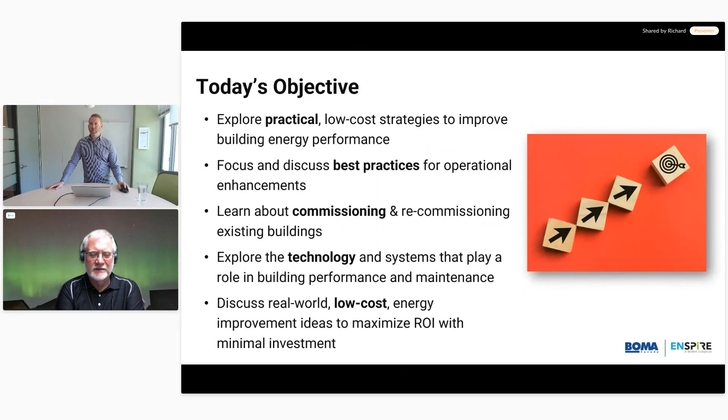Today's session is really all about looking at some practical low-cost strategies. We're going to focus maybe on some of the best practices that are out there, and I'm going to say that the recommissioning, as Richard does it, advocated by NRCan, and some of the energy scans and energy hunts that we all go to are best practice.

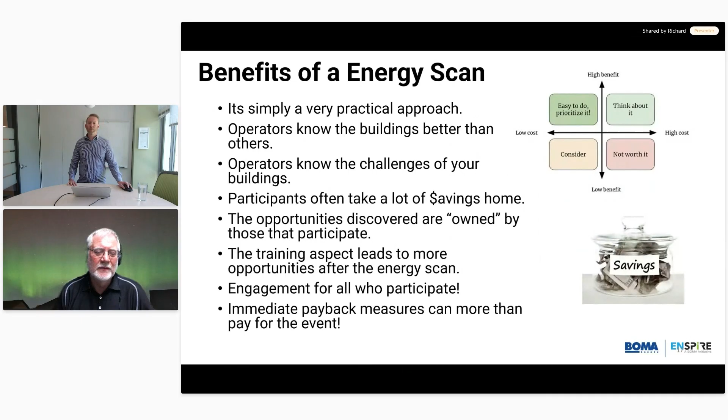The energy scan is a fairly simple and practical approach. I mean, if you've got someone who's an energy analyst, someone who understands energy data, understands energy systems, that's your facilitator. Now, you may have two people to do that, right? We would typically use two, but the idea here is that you've got to have someone to lead it that has the energy knowledge.

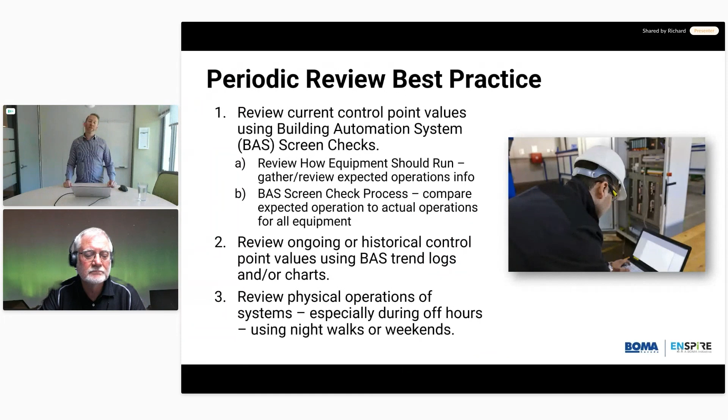Basically, this is the brains of a building. Most medium to large commercial buildings now will have some type of BAS, and it is, by and large, the best single tool that we have. Property managers, building operators, best tool we have to help identify and capture those energy savings.

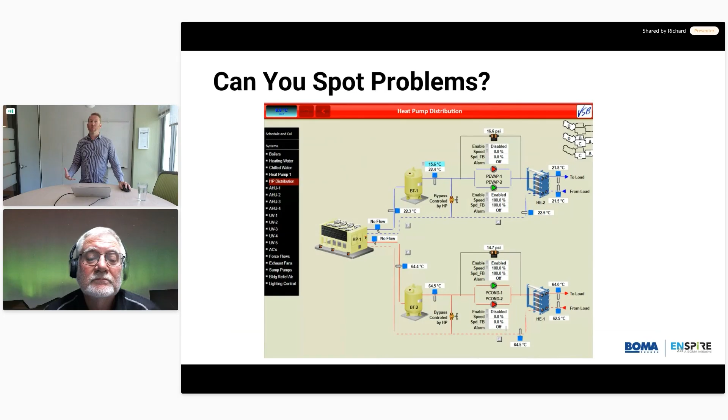We're seeing, especially here in BC, where we have that temperate climate, a lot more heat pump installations, with the heat pump being the main source of heating and cooling to a building. The important thing to remember with heat pumps is they are very temperature sensitive in terms of their incoming water. When you have a heat pump like this that's providing heating and cooling to a building, the return water temperature is crucial to make sure that the heat pump is operating within its limits and able to run as the lead heating source or cooling source.

We acknowledge that resources are limited, so property managers, building operators, they need a way to prioritize which building to do first. This new version of the pre-screening tool, which you'll be able to see today, get an advanced copy of, allows you to do that.

EBCx is not an energy efficiency measure, it's a procedure, a systematic process for looking at a building. And it goes well beyond just doing screen checks. There's no doubt that the screen checks and looking at the BAS is a valuable piece, and it can be a valuable part of a recommissioning. But basically, a recommissioning is a much more fulsome process.

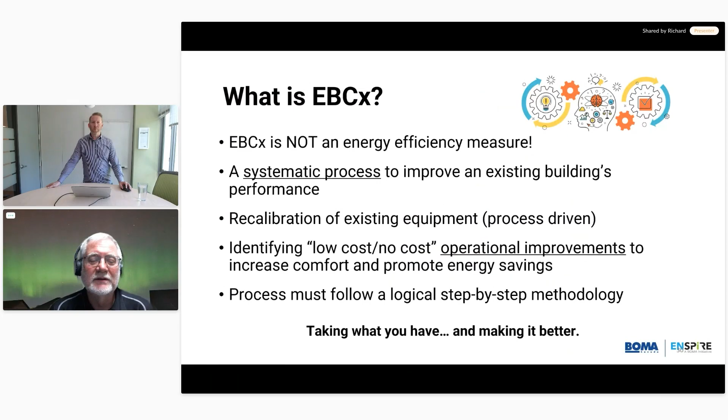It's a systematic investigation. It can involve recalibration of existing equipment, right? And many times does. It will definitely look for those low-cost, no-cost operational measures, which both improve energy but also comfort. Over time, buildings will age, right? And comfort problems can increase and energy performance can diminish.

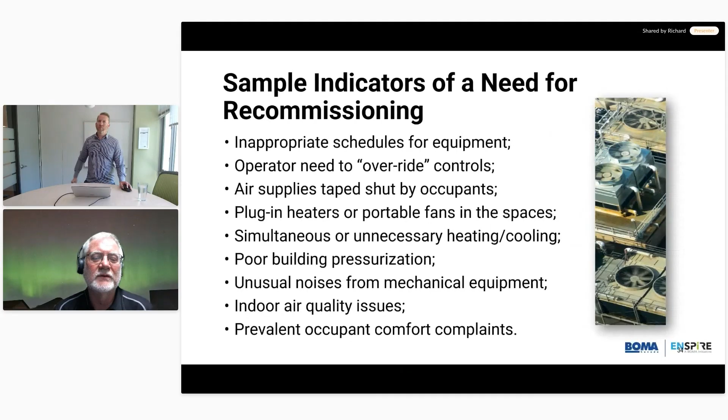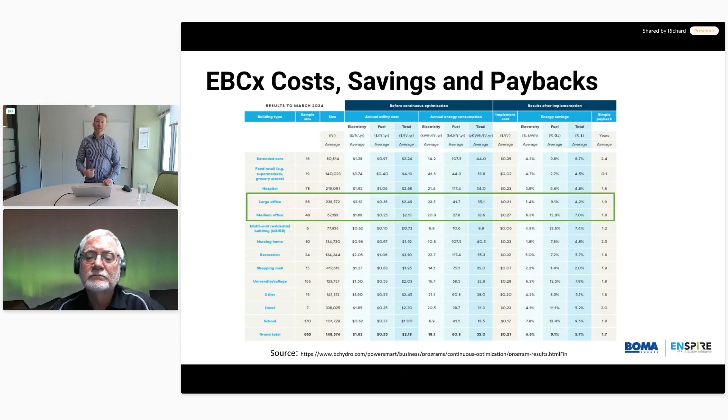A lot of the studies, a lot of the recommissioning work, like the consultants, like we do here at Prism, is funded by utilities. So whether you're doing it yourself or getting a consultant on board, the barriers to entry are very low, and the paybacks are often less than 2 years. We're trying to give you a comprehensive approach, how to do it by the book. These are all considerations that you need to be making when you're going into an EBCx project.

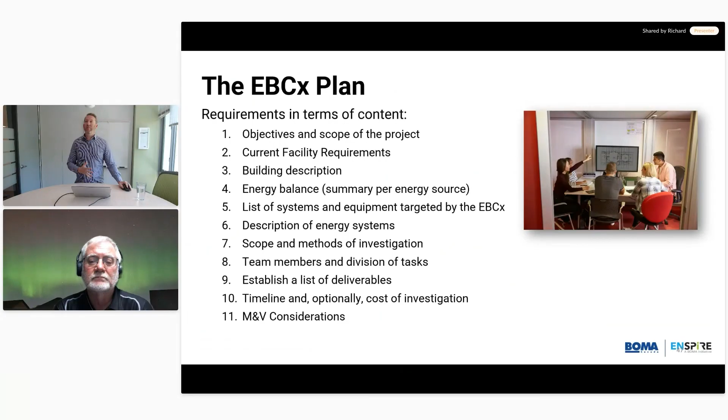Finally, as Stephen rightly pointed out earlier, training is a huge part of this. Some of the operators in these buildings have been there for years and know their buildings well. And when change happens, people don't necessarily respond well to change. So making sure they're engaged throughout the process. The human side of this thing is why a lot of it doesn't work, but when it does work, it's because of the human side of it.